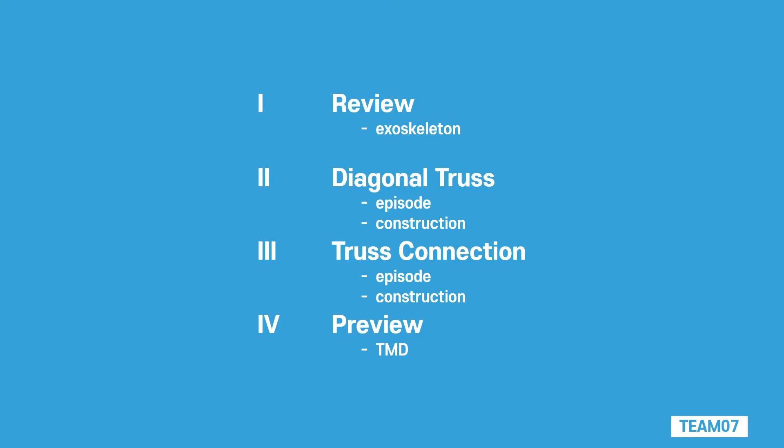Last week, we focused on the wind load and how considering it is critical to high-rise buildings like Burj Al Arab itself. Architect Tom Wright and structural engineer Anthony McCutter worked on how to withstand this wind load sufficiently while maintaining the building's outstanding exterior.

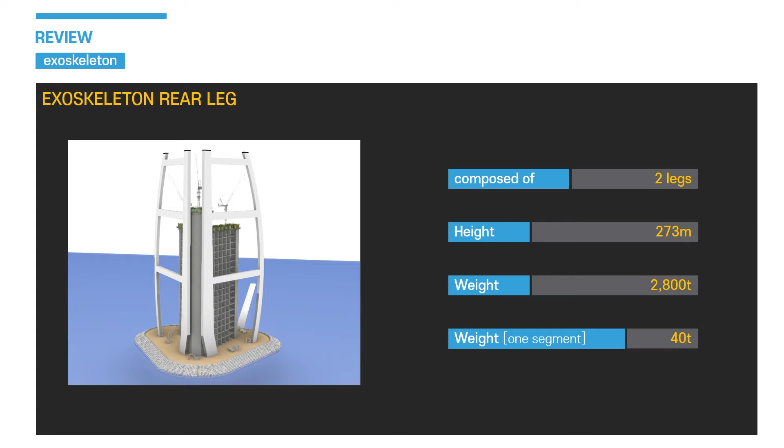The first solution they chose was to put an exoskeleton rear leg along the building. It is made up of two legs each, 273 meters high. It is a structure that resists the wind load most directly.

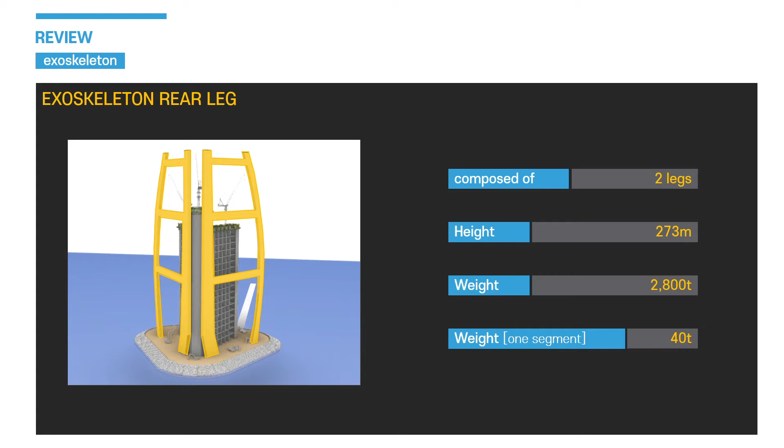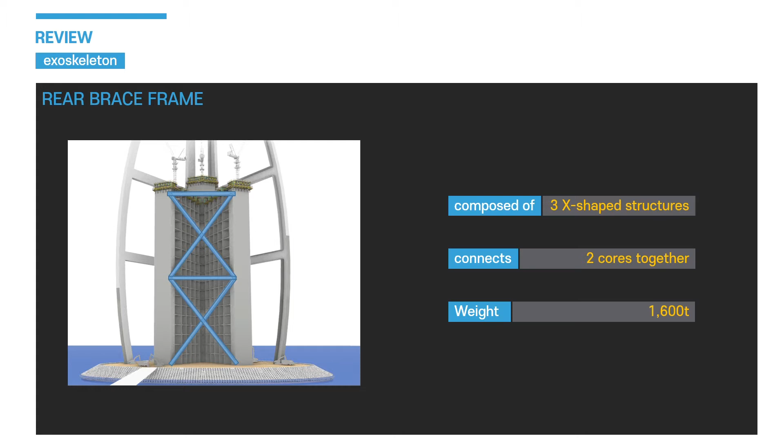The second solution was the rear bracing frame at the front. The rear brace frame, or the X-brace, keeps the V-shaped core from parting. The building has three X-shaped structures in total.

Constructing the exoskeleton rear leg caused three problems. First, how to maintain a perfect curve shape. Second, the thickness. Third, the corrosion.

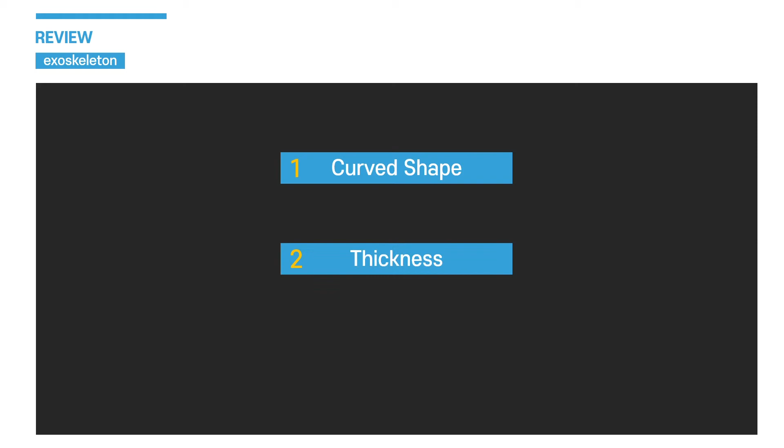The curve shape was achieved by dividing the 270-meter long structure into 12-meter short segments. That way, it was more suitable for the constructor to achieve a flat curve shape, like a yacht.

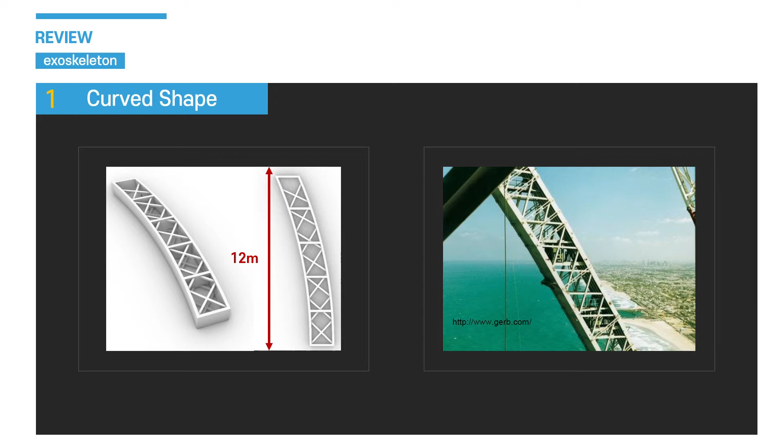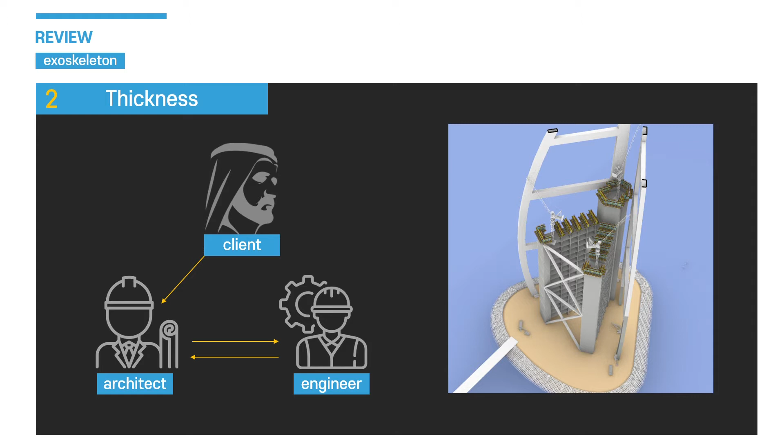The building standing at the shore of Dubai had to withstand strong sea wind. However, as the architect and the client wanted the building to look outstanding, they wanted the exoskeleton to be as thin as possible. As such, the engineer designed the structure thin, causing the need to add a TMD afterwards for sufficient stability.

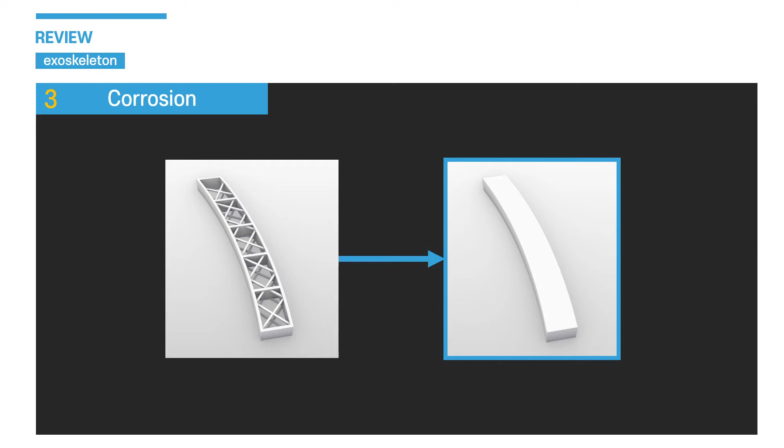The corrosion of the steel structure was also considered. It was prevented by spraying corrosion prevention spray and supplementing the surface with additional steel plate.

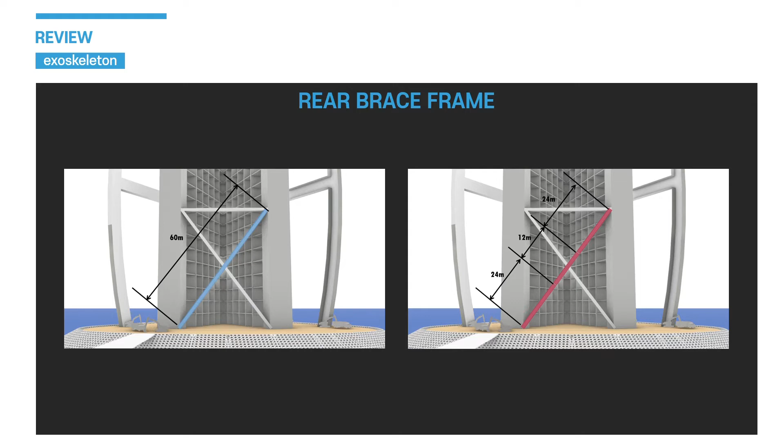The 60-meter long rear brace frame was divided into three parts when constructing. The segments were lifted using the sub-crane placed at each wing of the core.

These two structures were not sufficient in withstanding the wind load. This week, we will learn about additional structures for the wind load and how these structures were connected to the building.

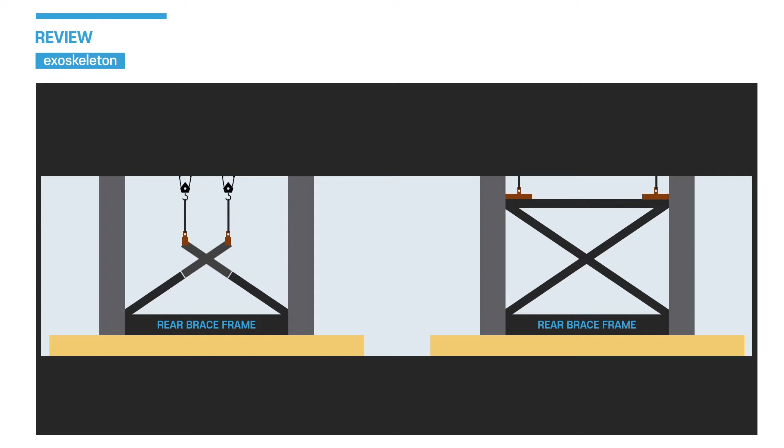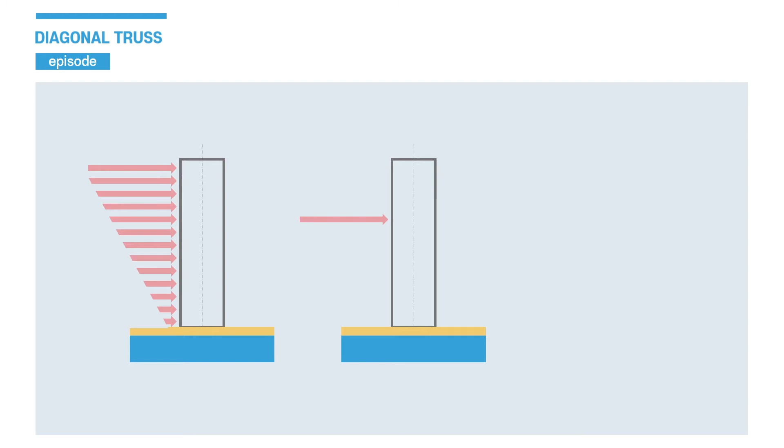We have learned that as the wind load increases with the height of the building, skyscrapers are exposed to hazards caused by wind. The Burj Al Arab tried to resist the wind load by installing an exoskeleton. However, there was a problem.

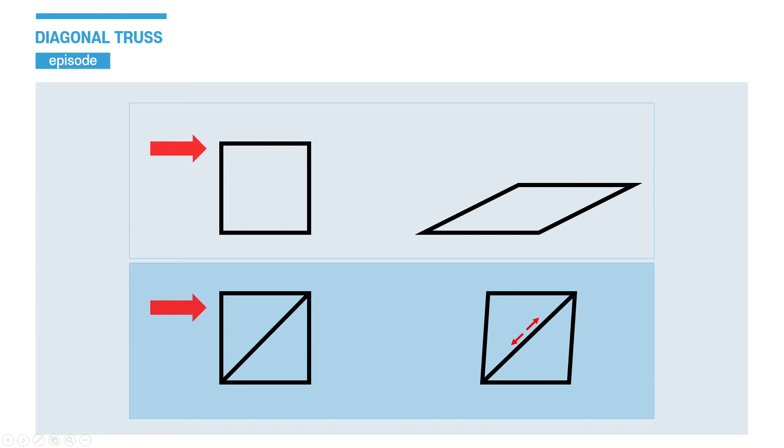When the structure is composed of only horizontal and vertical members, it rotates easily and collapses because it cannot resist the moment at pin support. Therefore, additional members to resist this moment are needed, and that is the truss. Truss is a triangular structure which stabilizes the structure by generating extra compression or tension.

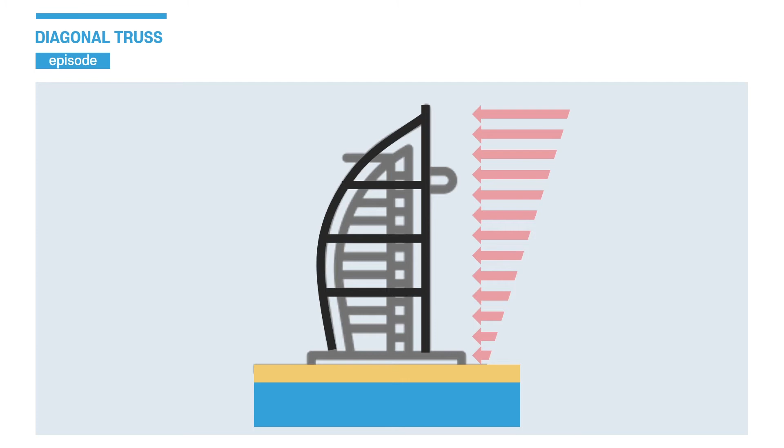The exoskeleton we had installed in advance was not stable with only horizontal and vertical members present. In addition, structural engineers asserted the need for truss to the architect. This truss would create additional tensile stress on the exoskeleton, consequently helping the structure to not collapse.

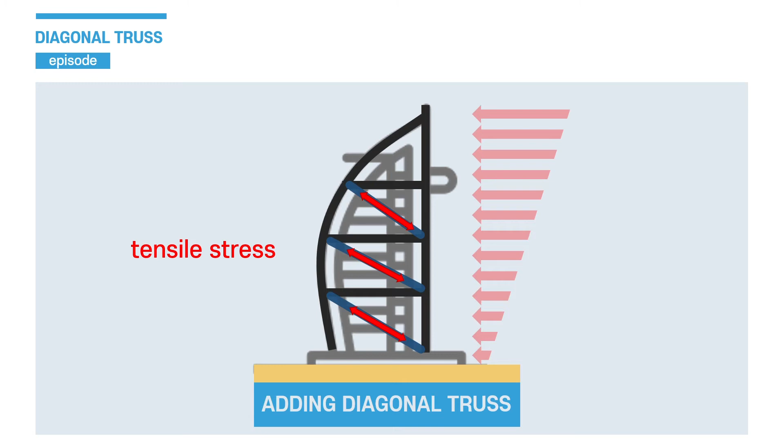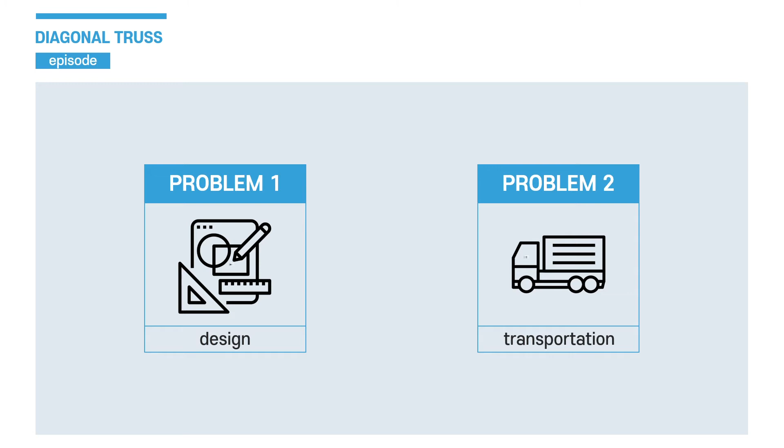Installing them had two problems. One was about the design of the truss, and the other was about its transportation. First, about its design.

The architect was very sensitive about the exoskeleton structures because it could affect the building's exterior. Therefore, the truss also had to be outstanding. He required it to be curved like the building and thin so as not to offend the hotel guests.

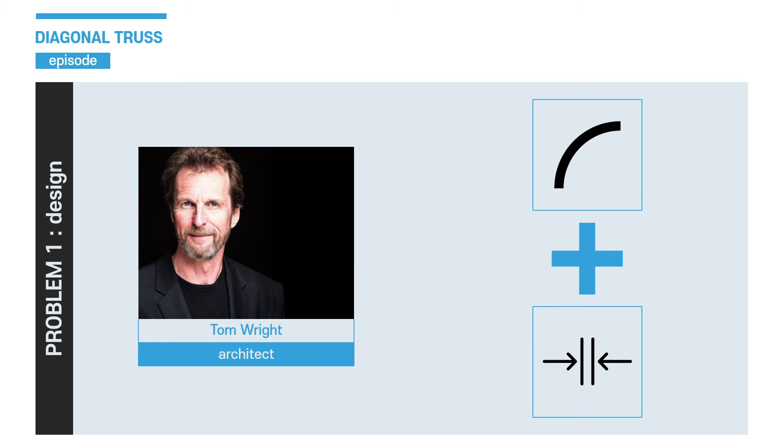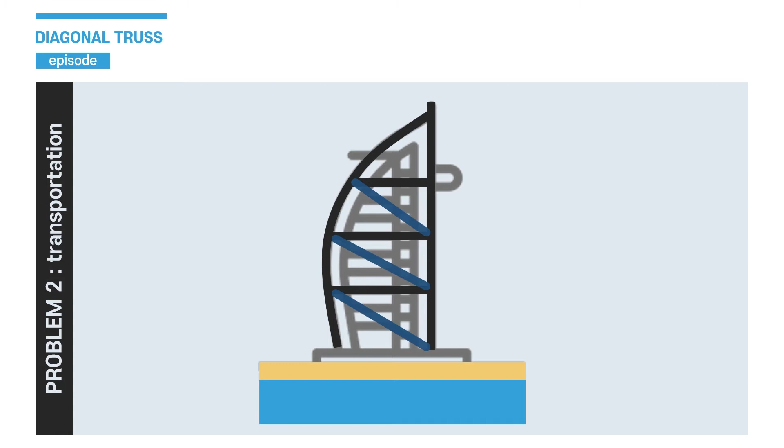Another problem was the transportation. The truss they were about to install was long and heavy. At first, the constructors wanted to divide the member into parts, transport them, and weld them in the air. However, as the truss required high stability, unstably welding them in the air would probably compromise that stability.

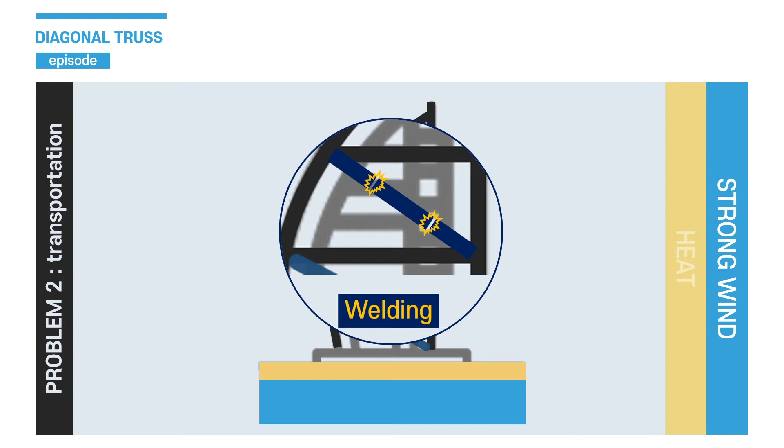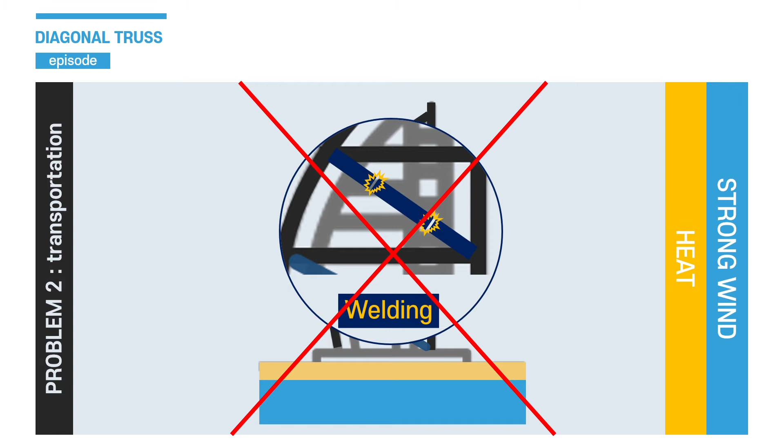Also, the heat of Dubai required them to consider thermal expansion. Perfectly fixing them to the exoskeleton would change the exterior later because of thermal expansion. As a result, the structural engineer decided to transport the truss in one part, and the chief contractor had to solve this problem.

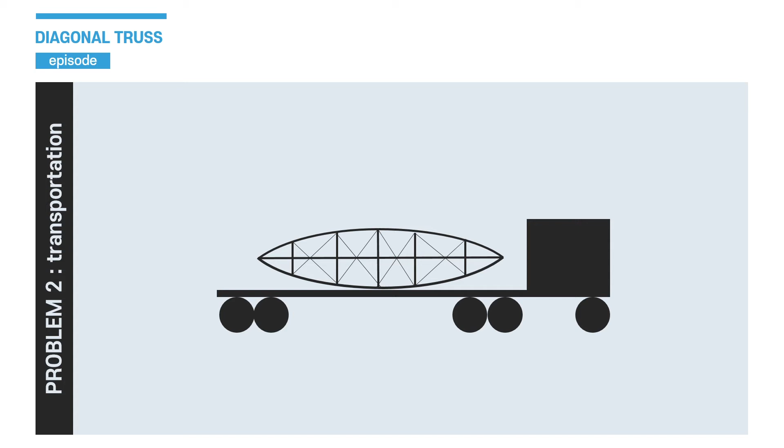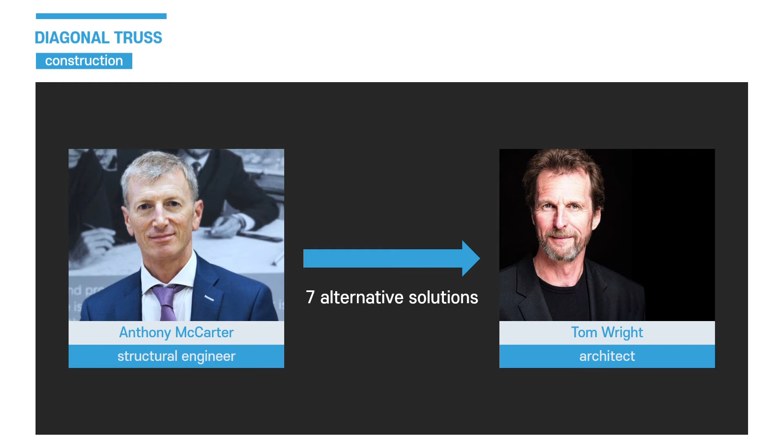So, how did they solve these two problems? First, for the design and stability, the structural engineer offered 7 alternative solutions to the architect. Among those alternatives, the architect chose one structure that satisfied his taste.

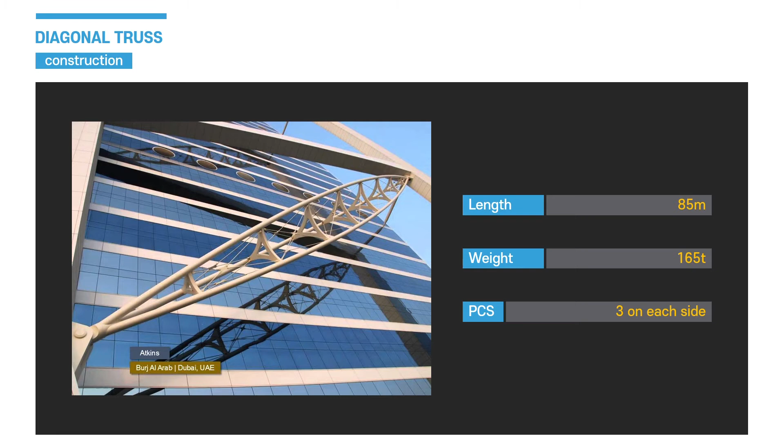The truss was 85 meters tall and 165 tons heavy, arranged in a very curved manner. There are 3 trusses on each side of the building. To withstand a strong wind load, the truss consists of an extra 8 trusses inside.

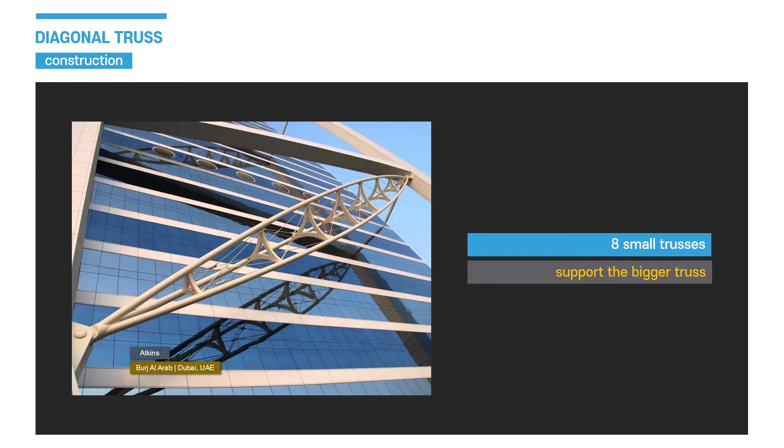For the prevention of corrosion, the surface was grit blasted using Metallization's arc spray systems. The aluminum coating is expected to guarantee 15 to 20 years of protection against corrosion in the harsh coastal environment in which the Burj Al Arab stands.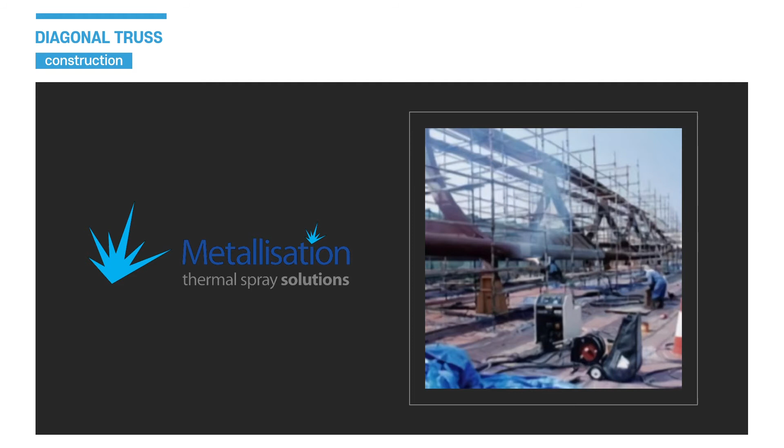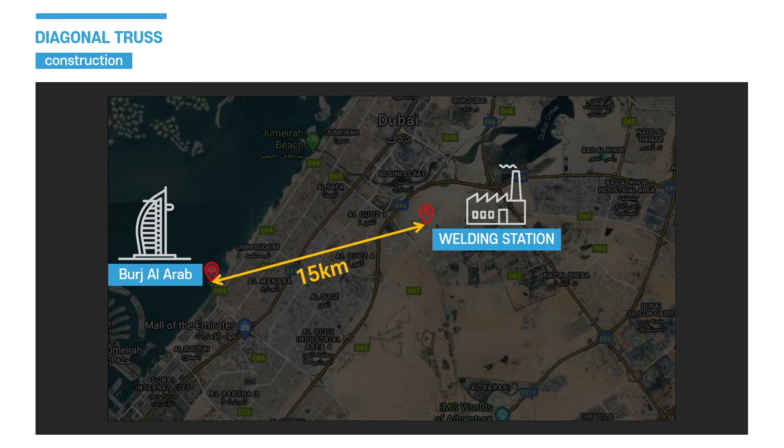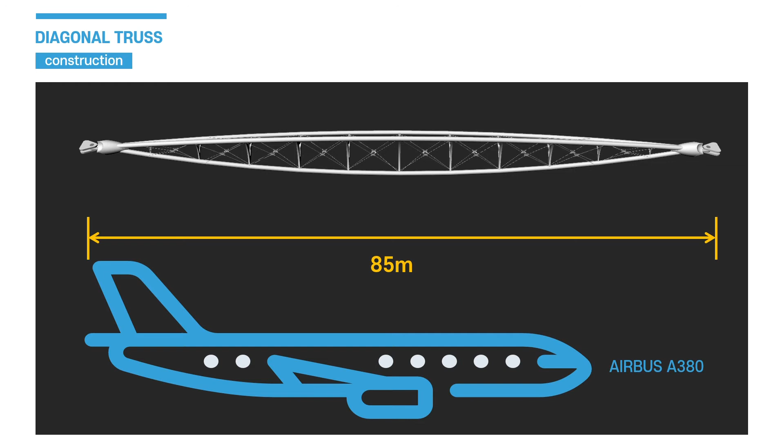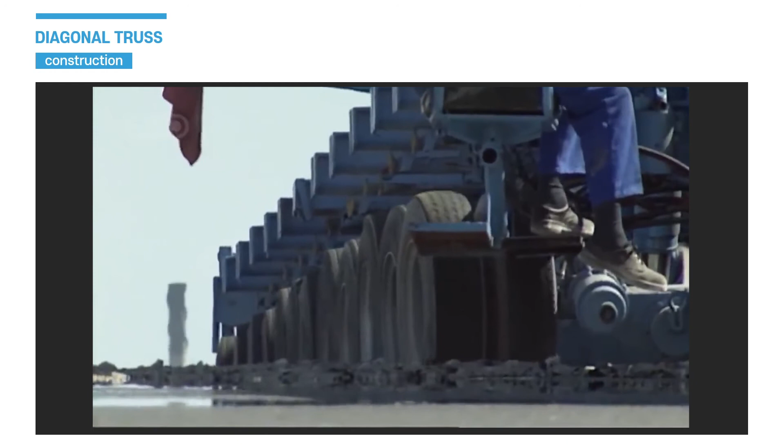The diagonal truss was manufactured in a yard 15 kilometers away from Burj Al Arab. As the truss was 12 meters longer than the 73 meter long Airbus A380, the biggest airplane existing, transporting the truss was no easy work. The chief contractor brought in one of the world's largest heavy lift transporters, a beast with a total of 80 wheels. It made the slow journey to the construction site at an average speed of around 6 kilometers per hour.

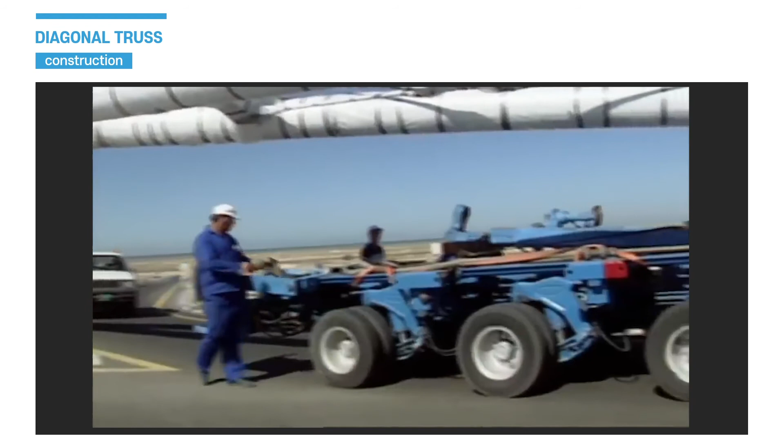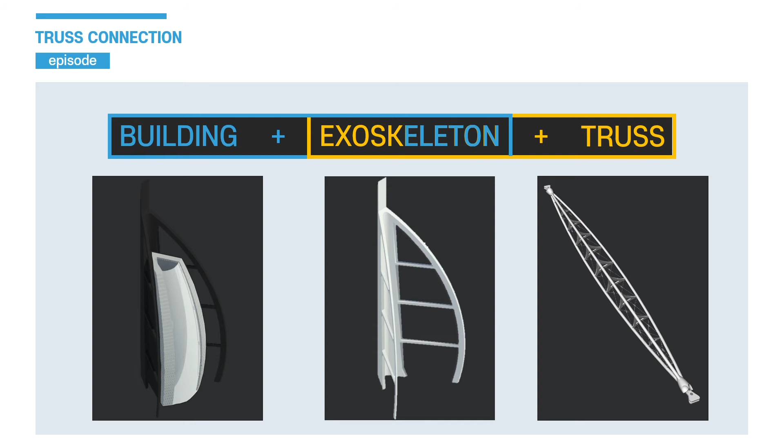How the truss was connected was also a problem. If a perfectly designed steel structure for wind loads fails to fully engage with the building, it will be like a statue erected in front of the building. As such, the connection between the exoskeleton and the building is very important. This connection can be largely divided into two parts: the connection between the building and the exoskeleton, and between the exoskeleton and the diagonal truss.

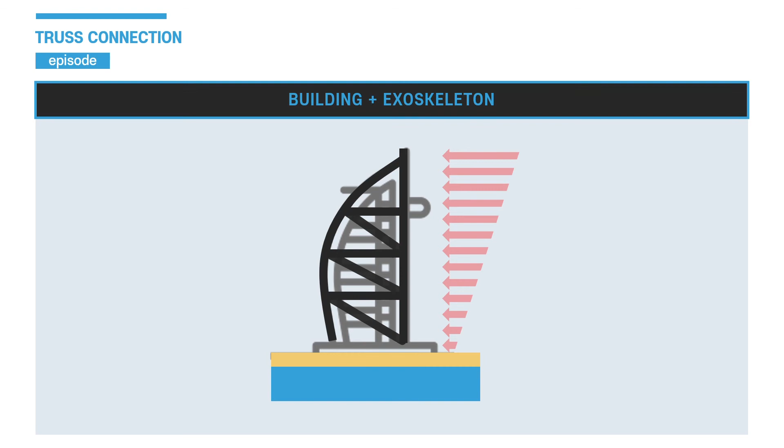Connecting the exoskeleton and the building was quite simple. To withstand wind loads that act directly on the building, the exoskeleton must be subjected to sufficient force in every part. Therefore, the connection is required where the most effective force can be dispersed when the load on the building is analyzed. The problem was the connection between the exoskeleton and the diagonal truss.

They could not simply weld the diagonal truss to the structure because of the hot weather. Dubai has an average annual temperature of 30 degrees Celsius, a maximum temperature of 49 degrees Celsius, and a daily temperature difference of 14 degrees Celsius or higher. Therefore, in hot daylight the steel structures expand, while at night they shrink.

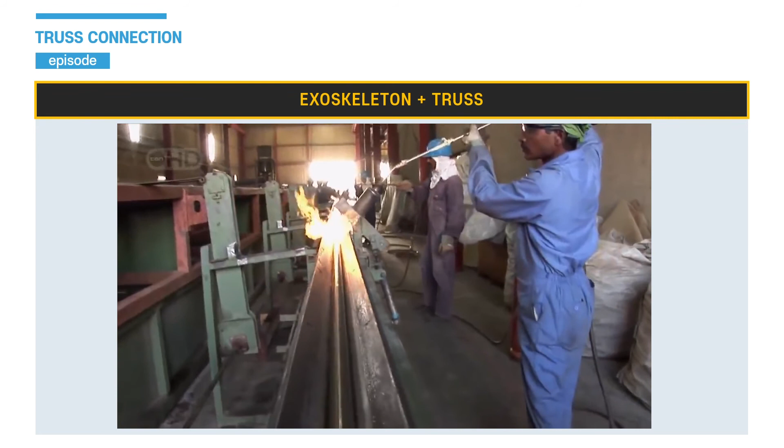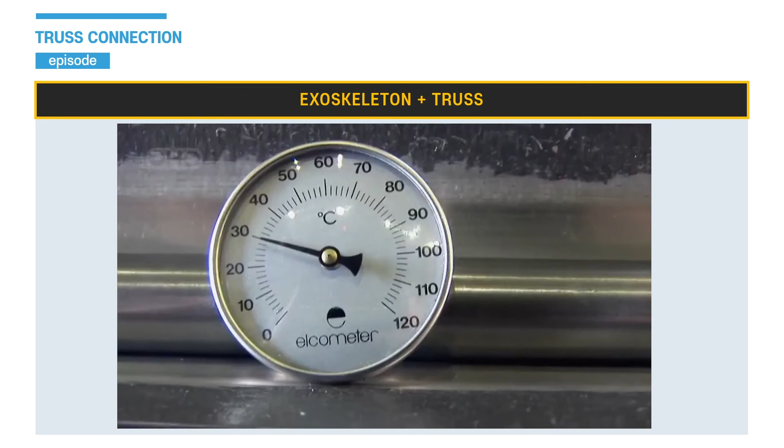When the 85 meter long steel structure was heated, it could expand up to 5 centimeters. Five centimeters is a short length for normal people, but when strongly welded to the building, it could severely damage the exoskeleton. The chief contractor and the structural engineer had to consider thermal expansion above all.

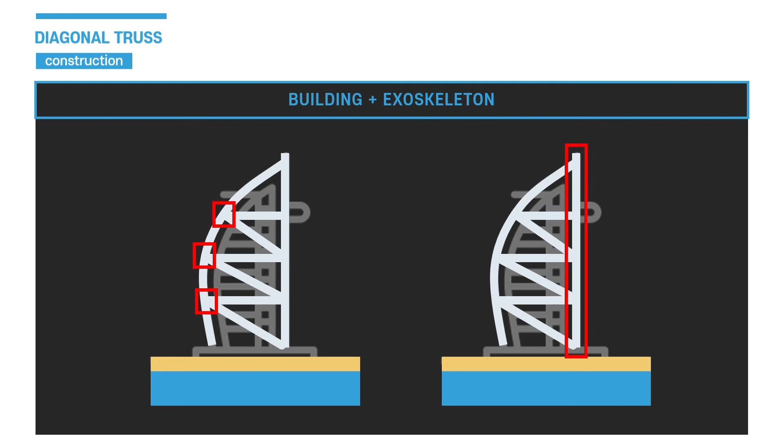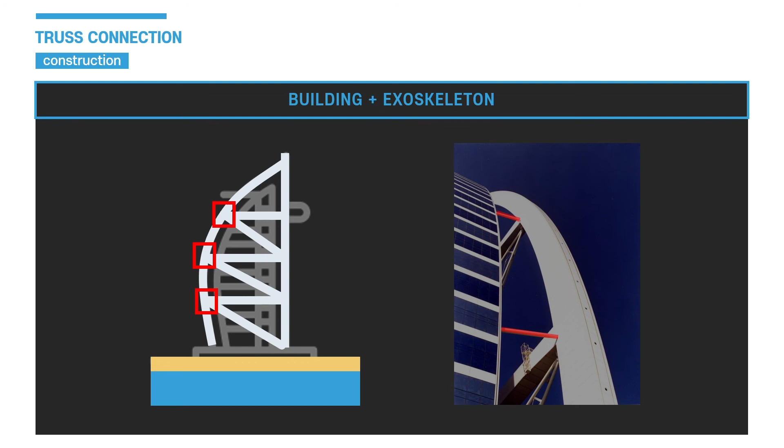The connection between the building and the exoskeleton is divided into two parts. The first is the connection between the rear bracing and the exoskeleton, and the other is the connection between the core and the exoskeleton, which most directly resists wind loads. The former part was connected by a girder from the rear bracing frames directly, to deliver the lateral load of the building to the exoskeleton. For the latter part, the exoskeleton was connected directly with the core from the beginning.

Connecting the truss to the exoskeleton was a trickier job. That was because it had to lift 165 tons of huge truss, close to the weight of 16 express buses, up to the point of support for its connection to the exoskeleton.

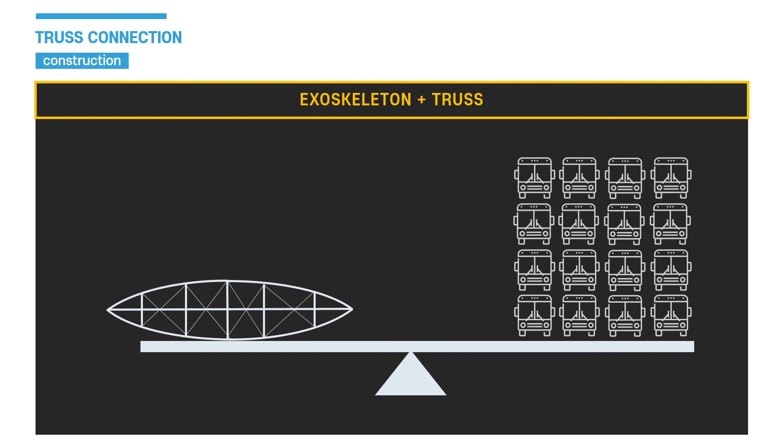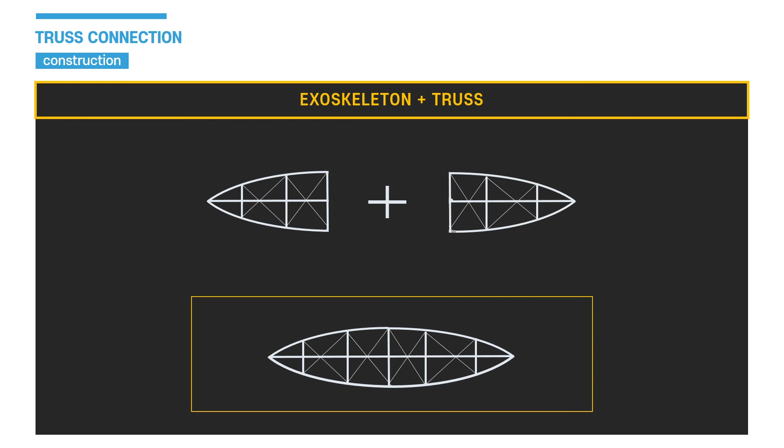The engineers considered dividing the truss into two segments for the safety and convenience of the job. However, because it could not be easily welded in the air, constructors decided to lift the whole truss in one piece. Lifting the truss was hard work for the three tower cranes already installed at the site.

Therefore, the chief contractor looked for a solution and brought in special lifting gear from Singapore. His team set up winches, like those used on offshore drilling rigs, high on cantilever frames 15 meters from the building.

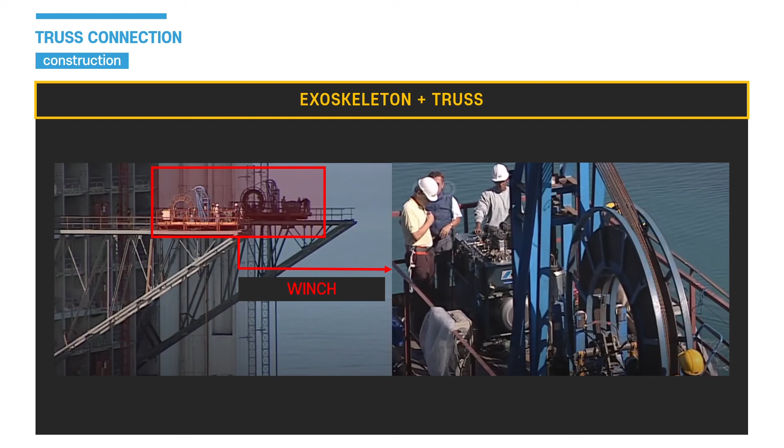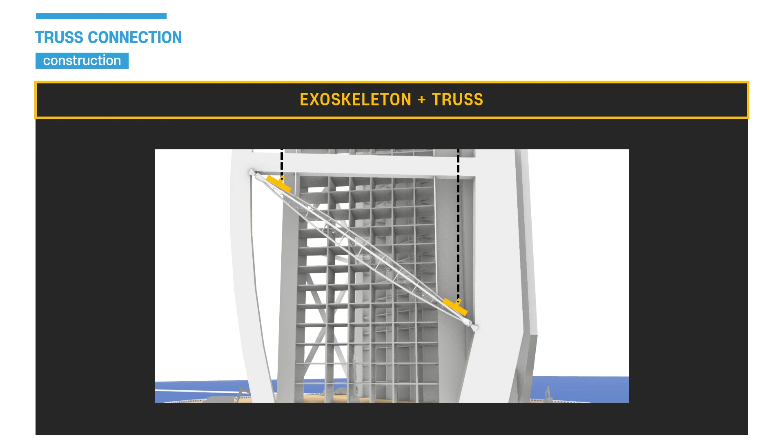Cables with a breaking strength of 225 tons are attached to the end of the truss. The two massive winches take up the strain and painstakingly raise the diagonal truss little by little up beside the building. The construction team were able to raise the truss to the appropriate height, but the question of how to connect them remained.

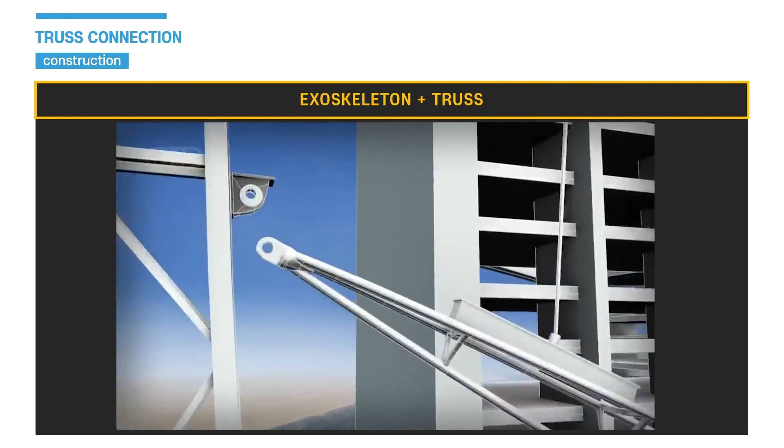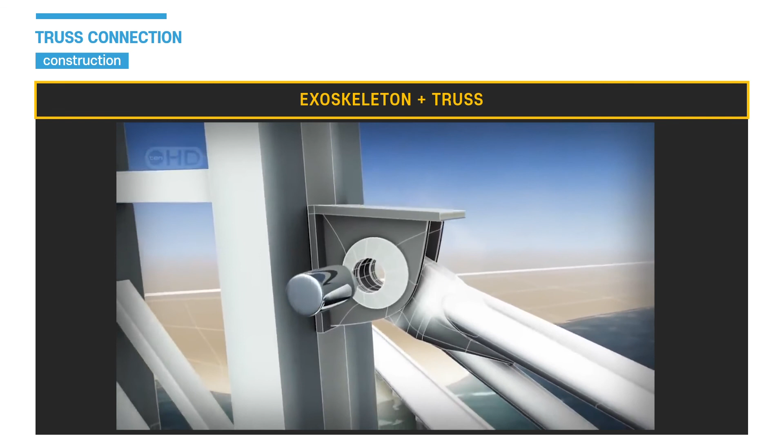To fluently solve the thermal expansion and shrinkage problem, the fixing bracket on the frame contained a vast washer which swivels until it lines up with the hole in the diagonal truss. Then the steel pin is inserted through both holes, locking them together. This device could adjust itself fluently by swiveling when expanded or shrunk, and the truss is now fixed securely in place.

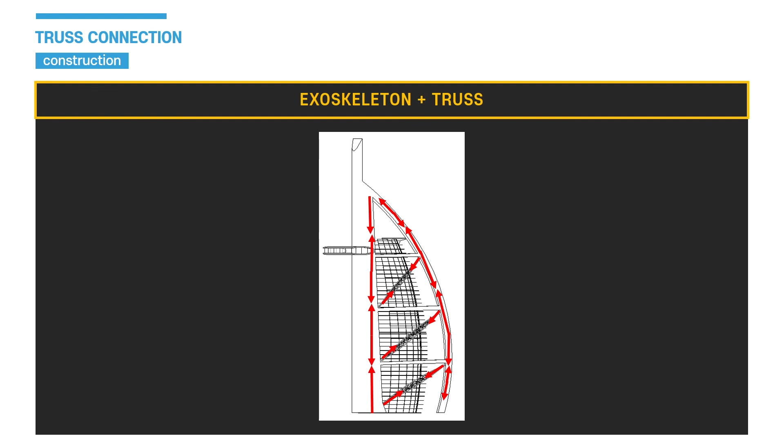This connection between the main building, exoskeleton, and trusses serves to deliver the lateral load acting on the entire building, especially wind load, to the exoskeleton. However, withstanding the wind from the shore was not the only problem. The engineers had to solve a problem of vortex shedding in front of the building, also caused by the wind.

How they solved this, we will learn in our next presentation. Thank you for listening.